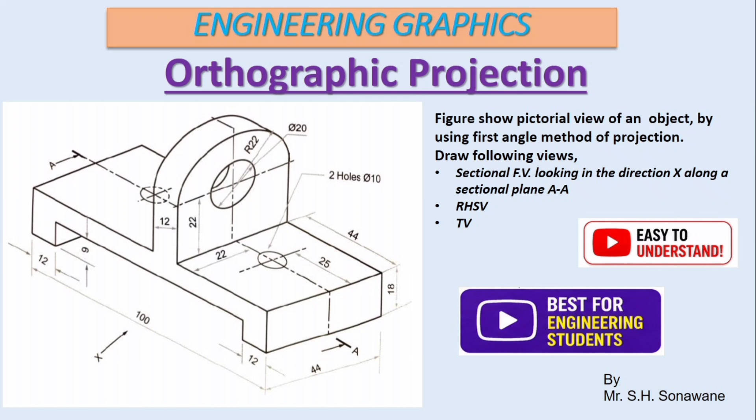In this session, we are going to solve another problem based on orthographic projection, and we are solving it in a simple and exam oriented manner. Here is the problem statement: the figure shows a pictorial view of an object using the first angle method of projection. Draw sectional front view along section AA, right hand side view, top view and dimensions.

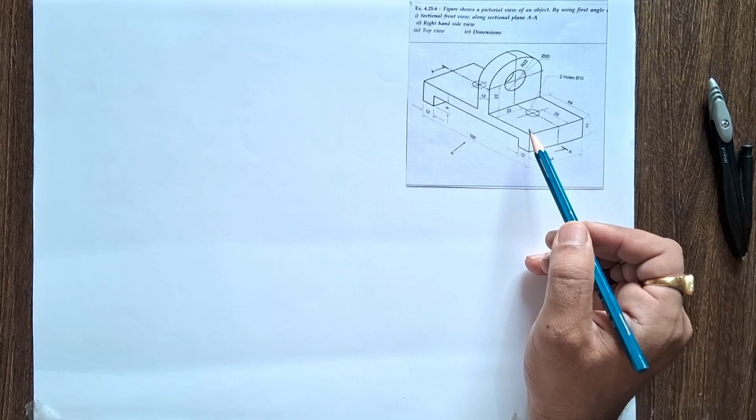This section is important in orthographic projection because in 3D views, some parts in front view, top view, left hand side view and right hand side view are not seen or they are hidden.

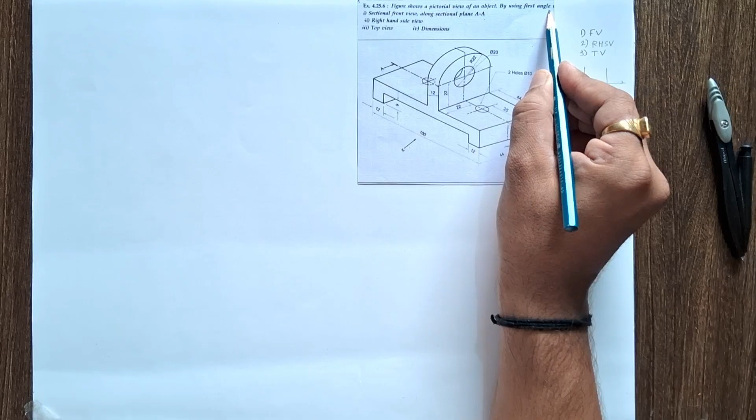So in the first angle method of projection, the object is placed in between the vertical plane and the observer. This is the vertical plane, this is the horizontal plane. So if the looking direction is x, on the vertical plane we get a front view for this object.

आणि मी जर वरून बघितलं तर मला टॉप व्ह्यू बघायला मिळेल. तर दिस इज अ व्हर्टिकल प्लेन, हा झाला हॉरिझॉन्टल प्लेन. Above the XY axis, the plane is called the vertical plane. Below the XY axis, the plane is called the horizontal plane. On the vertical plane we get a front view, आणि एक्झॅक्टली बिलो फ्रंट व्ह्यू आपल्याला टॉप व्ह्यू मिळतो.

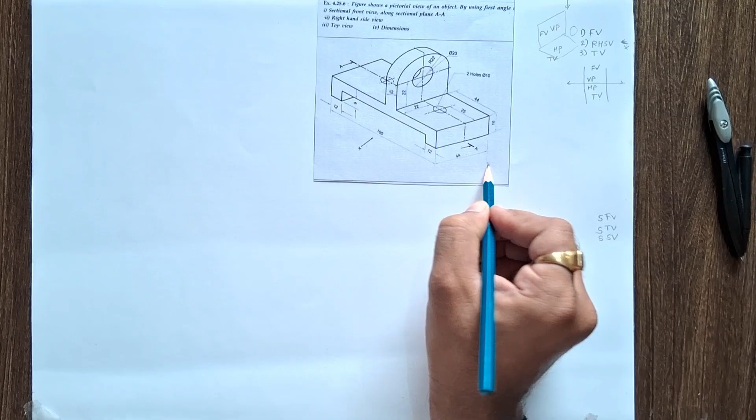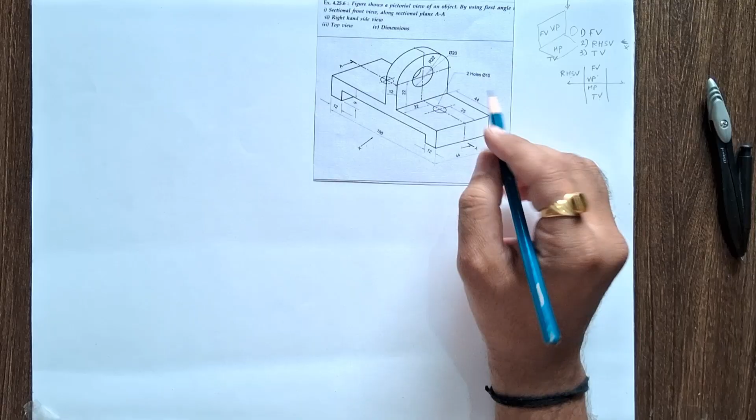पुन्हा एकदा लक्षात घ्या की आपण हा प्रॉब्लेम विदाऊट सेक्शन पहिले सॉल्व्ह करणार आहोत. त्यानंतर सेक्शनल फ्रंट व्ह्यू आपण फाइंड करून फायनल सोल्युशन फाइंड करणार आहोत. सी द सोल्युशन.

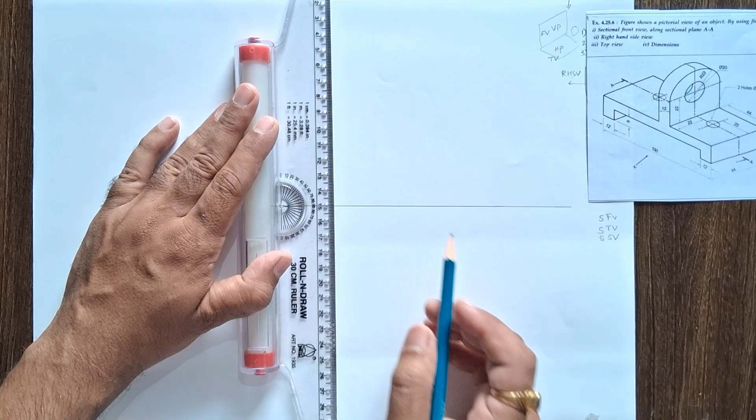Draw the XY axis first. And perfectly draw the perpendicular to the XY. This is XY. Then draw the reference line, another reference line which is at 10 mm on the left hand side and right hand side. So mark at 10 mm distance.

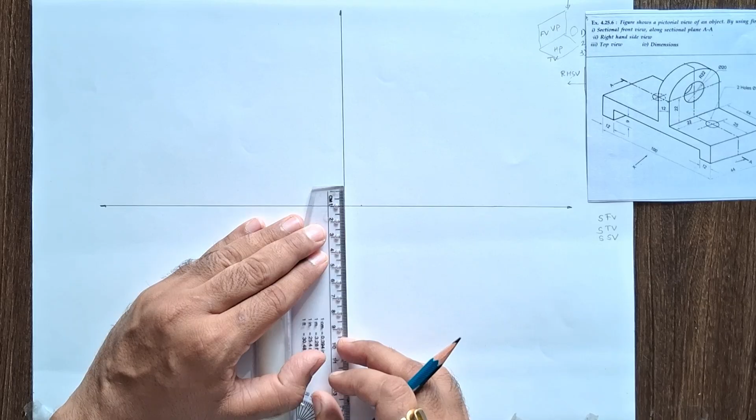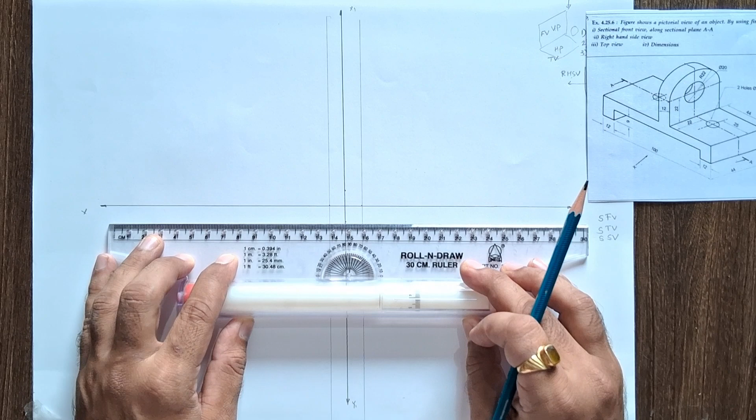And similarly above the XY and below the XY, again mark 10 mm distance. So this is X, Y, X1, Y1. Now draw the thin reference line. Draw the horizontal reference line.

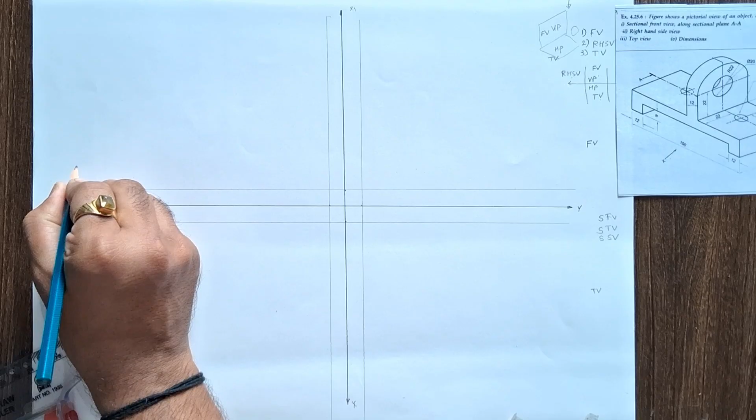So for this ortho problem we require this construction. This is a front view plane. हा इथे टॉप व्ह्यू मिळणार आपल्याला आणि दिस इज ए right hand side view.

Now see the object. Now the length of this object. Observer is looking at this object from this direction. So this is the length, from this end to this end is the length of this object.

In the front view, we can see this hatching section. This full surface is visible from the front side. These three circular holes are not seen from the front view or front side from the X direction. हा जो सर्क्युलर पार्ट आलेला आहे, हाफ सर्क्युलर सेक्शन, इट इज नॉट विजिबल. इट इज विजिबल बट इट लुक्स लाइक ए रेक्टेंग्युलर, it looks like a rectangular shape.

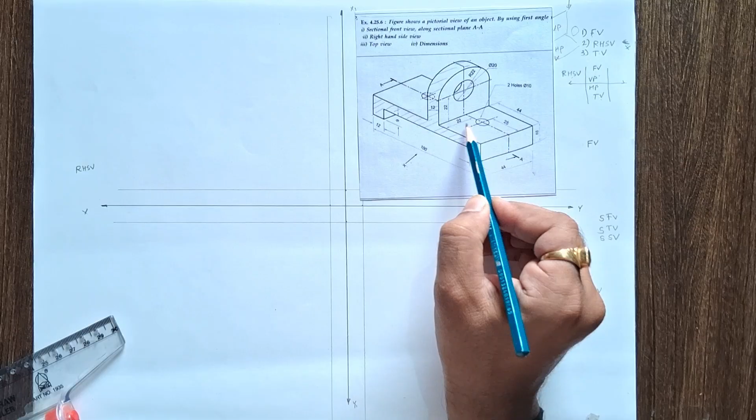Now here is the total length of this object, 100 mm. 100 mm is the total length of this object. Height of this object is 18 mm. 18 plus 22 — 18 is the bottom slab thickness or height, 22 mm is the vertical distance from this base to the center of that circle, and the radius of the outer circle is 22 mm. So the height for this object is 18 plus 22 plus 22. This is the total height for this object.

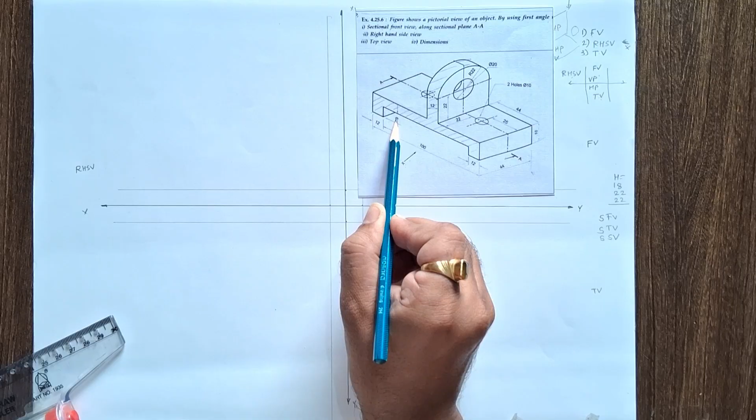Now you can see here the rectangular slot is given and its height is 9 mm. The thickness of this object is 44 mm and the vertical half circular wall is at the center of this object. Now we will see the solution.

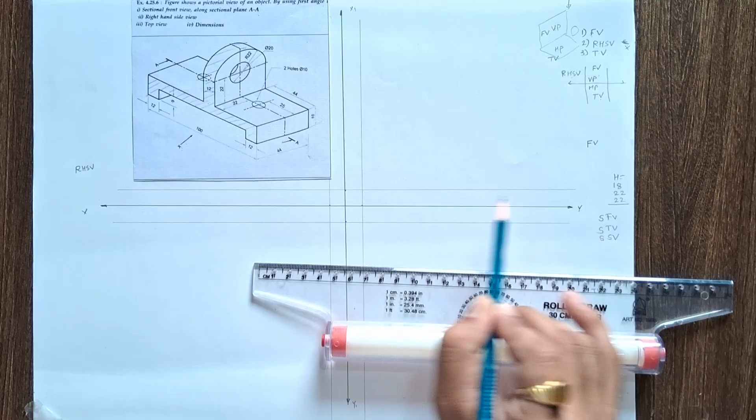We will draw the front view of this. सिंपल फ्रंट व्ह्यू विदाउट सेक्शन आपण सॉल्व्ह करणार आहोत. तर इथे हा जो कॉर्नर आहे, हा कॉर्नर परफेक्ट ओव्हरलॅप होणार आहे ह्या पॉईंटवरती आणि इथून आपण 100 mm डिस्टन्स मार्क करणार आहोत. This is 100 mm, 100 mm. Now the distance of these two small edges are 12 mm.

So we will mark 12 mm distance.

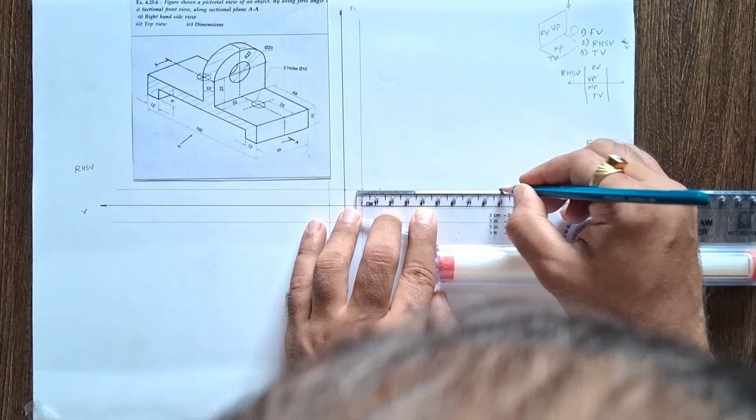From both the ends, we'll draw the 12 mm distance. Then the height of this bottom slab is 18 mm. So along the vertical plane, mark an 18 mm distance.

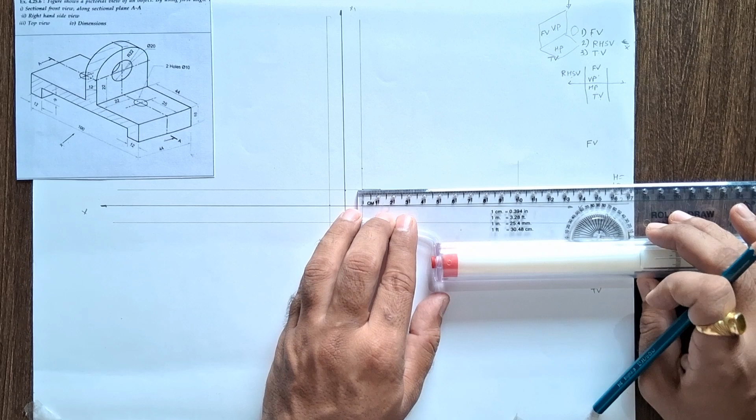Find the center of this object because this object is symmetrical. So the center position, midpoint position, is at 5 mm, 50 mm, 5 cm. This is the center line.

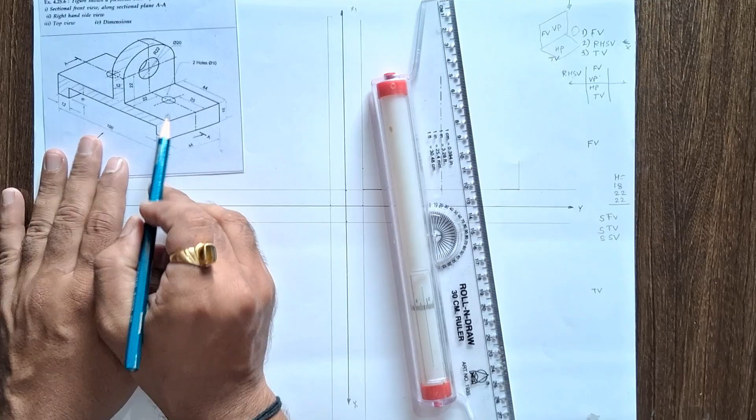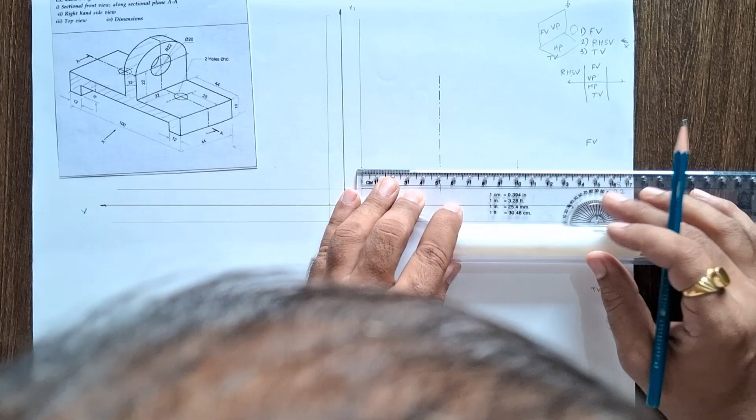This end to this end distance is 44 mm, given here. Similarly from this end to this end distance is 44 mm. First we will mark this point which is at 18 mm above the baseline, and then mark a 44 mm distance from both ends. This is 44. This is 44. Now these two edges are visible from the front side, from the x direction.

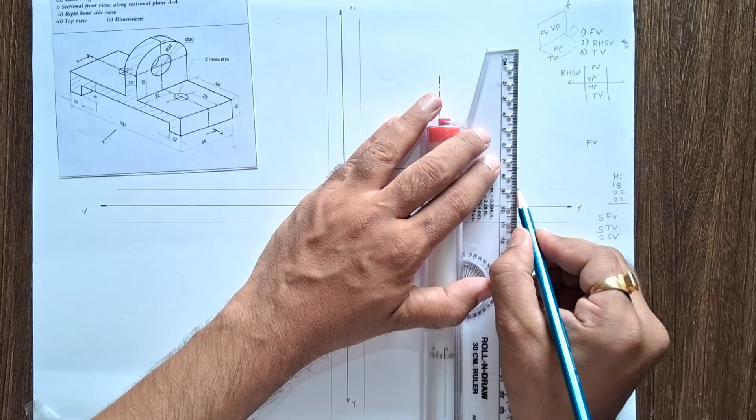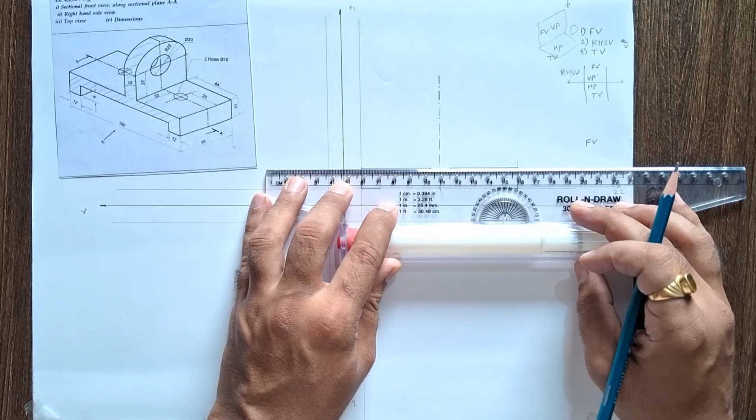Now here the bottom rectangular slot, its height is 9 mm. So from this point we can draw a 9 mm distance. So this slot is visible from the front side.

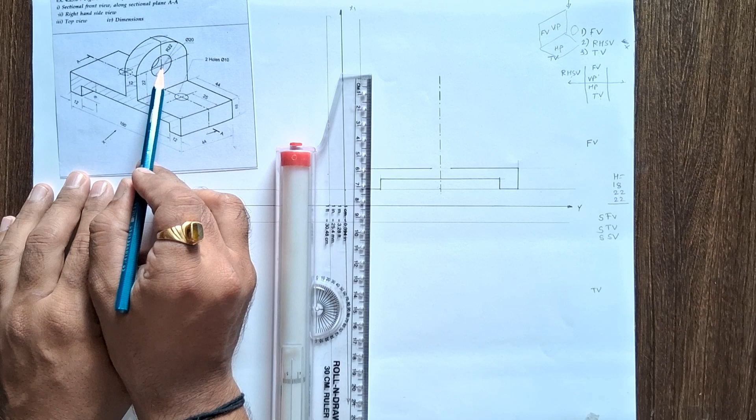Now the center of that circular part is at 22 mm above the base. So we will draw the 22 mm vertical line which is perpendicular to the base. Now this line is perpendicular and the height of this vertical edge is 22 mm.

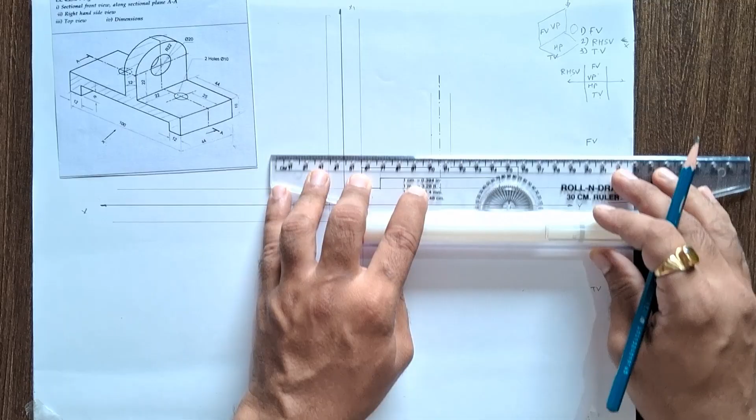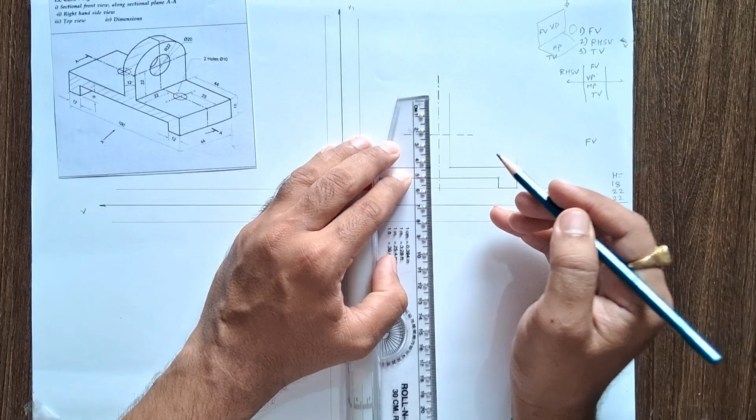This is 22 mm, and from this point we can draw the center for that circular part. From this center, the half circular part, its radius is 22 mm. R22 is given. From this, we will mark again a 22 mm distance. So this distance is 22 mm. So this part is visible from the front side.

Now on this part, on the vertical wall, there is a circular hole of diameter 20 mm. So along the center line, we will mark 10 mm and 10 mm distance. Because the circular hole is not visible from the front view, we can show this hole with the help of a hidden line.

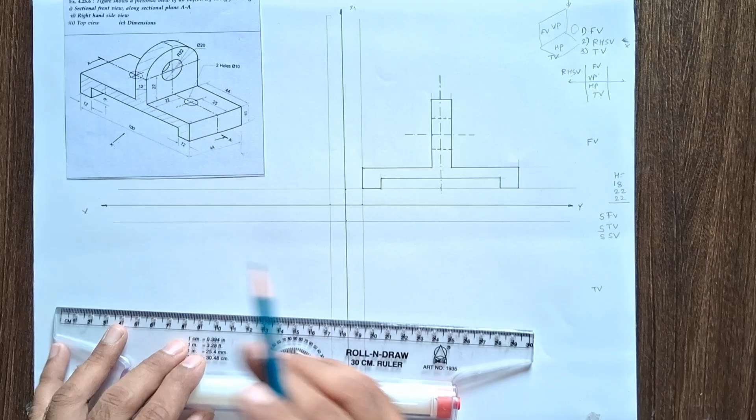This is the circular position. Now the two holes, their distance is given from both ends. The distance of the center point of this small hole is at 25 mm. So from both ends we will mark a 25 mm distance. From this end also, the other end, right end, you can mark a center line.

Mark a center line first and then draw a 10 mm circular hole. For that, measure the 5 mm distance in the compass. From both ends, from this center distance, mark a 5 mm distance. With the help of the compass, we can easily mark this distance, and by using a hidden line, show this circular hole.

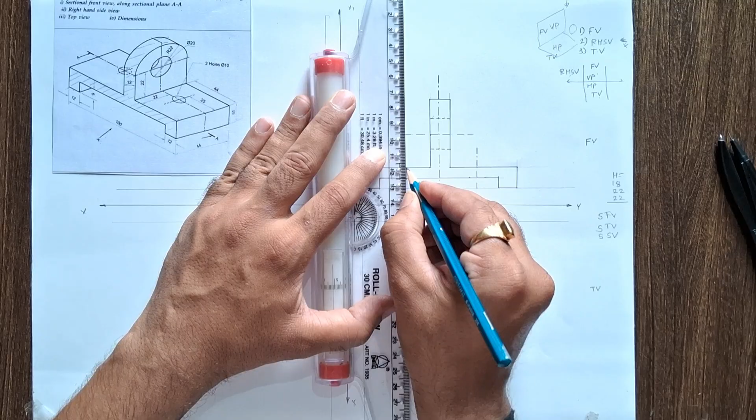This whole thickness is through, holes are through. Now we have completed the simple front view.

Now with the help of the front view, we can easily draw the top view. In the top view, we can see this full flat surface.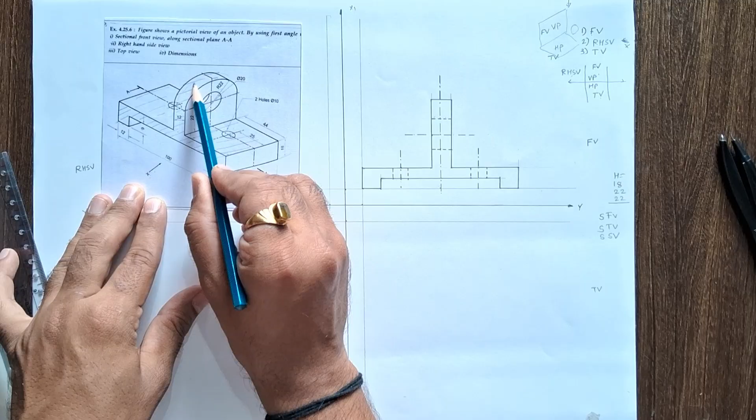As well as the half circular part we can easily see from the top view, top side. Now take a projection for the top view. Take a vertical projection on the horizontal plane.

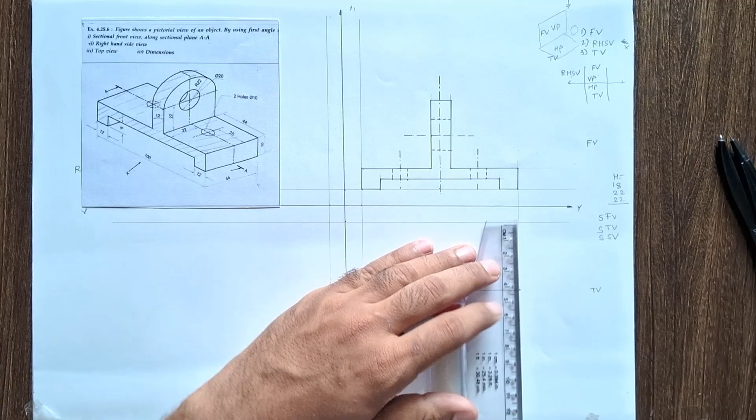Thickness is given as 44 mm, so we will mark a 44 mm distance. And this object is symmetrical, so we will find the center or midpoint, and the midpoint is at 22 mm.

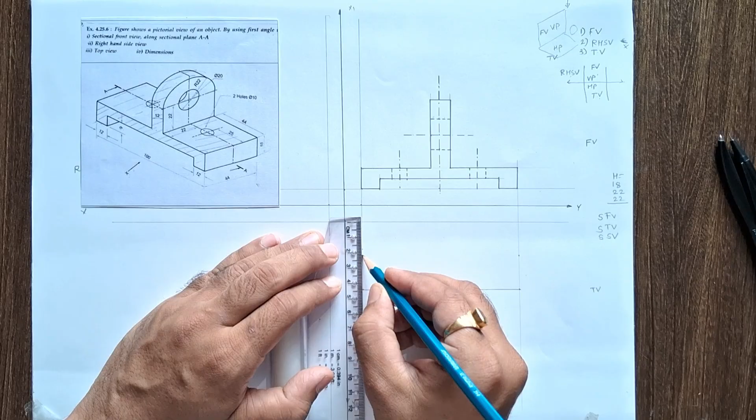So we'll mark a center line. Mark a center line.

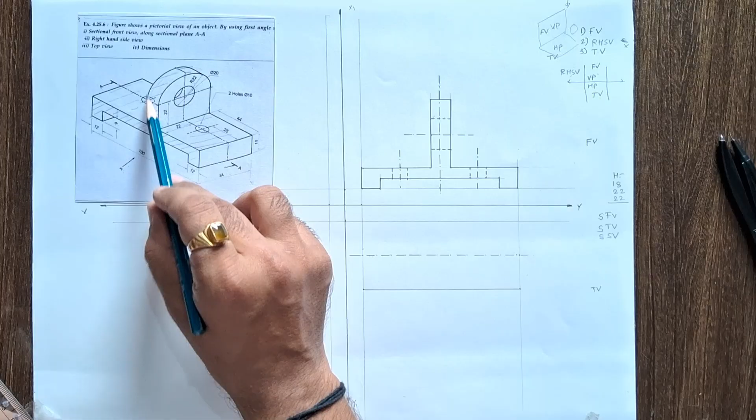If the object is symmetrical, we need to show the center line, and the center line is shown by using a long dash dot line, this is the center line. Now in the top view, this half circular part looks like a rectangle again.

So take a projection from the front view, take a vertical projection, and by using a thick line we can show this vertical wall as well as these two rectangular surfaces, which are visible.

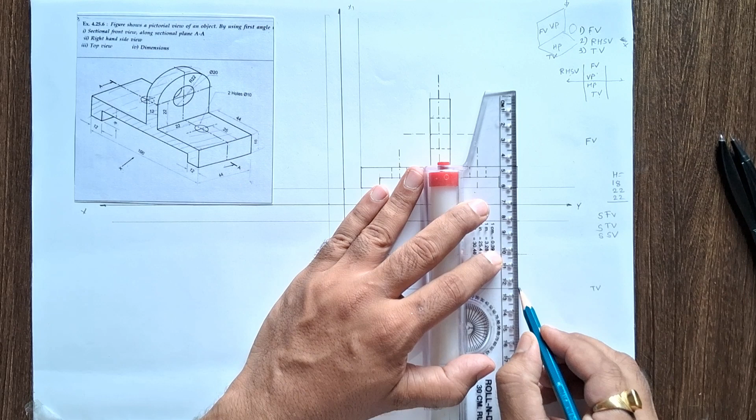Already these two holes are visible from the top, and we finalized their position in the front view. From this end, the circular hole is at 25 mm, so this distance is 25 mm. So you can directly take the projection from the front view.

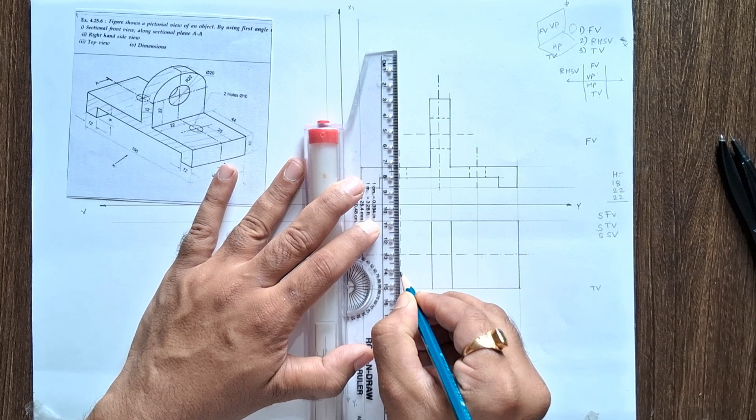And this line is a center line for this object. The circular hole center line is at 25 mm and 22 mm.

Now take the 5 mm radius compass and draw a circle.

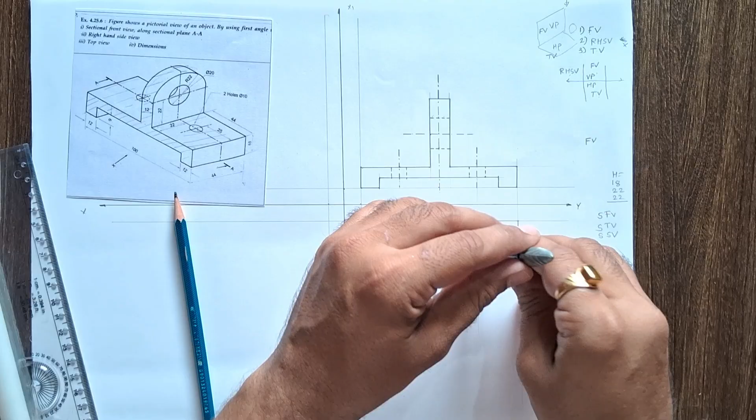Similarly, the other circular hole is visible. This is circular. Now, this vertical circular hole of diameter 20 mm is not visible from the top view.

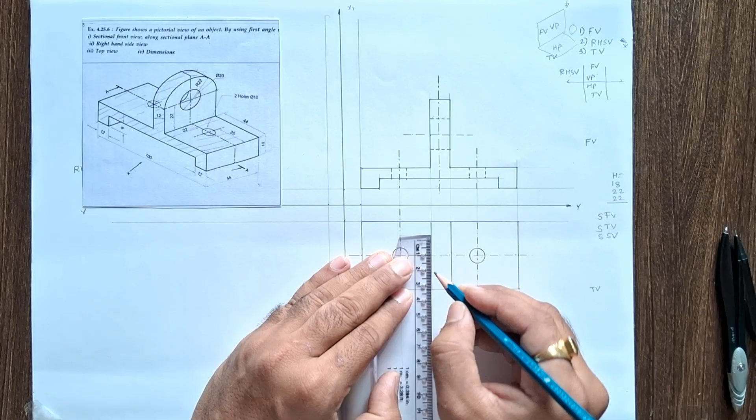The position of this circular hole is here. So from this center line, we will mark a 10 mm distance above the center line and below the center line. And by using a hidden line,

You can see, so this is a top view. One line is missing here. This slot's edge, the line going to the width side, is not visible from the top view.

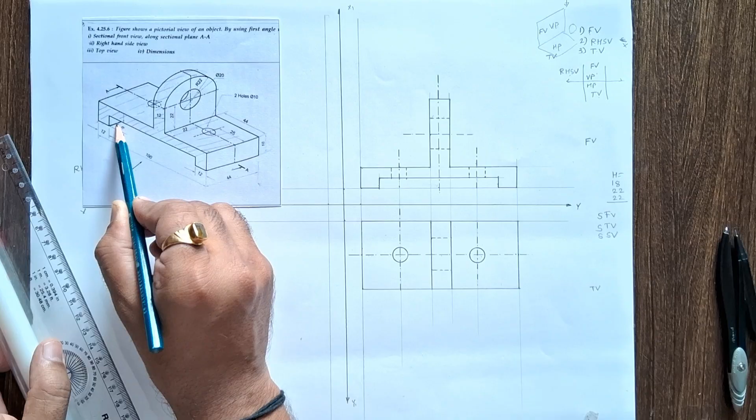So with the help of a hidden line, we can show this line. Similarly here, this edge is at 44 mm. Now this is the complete top view for this problem.

Now for the side view, from this intersection point, mark a 45-degree angle. This is a 45-degree angle. Now with the help of the front view and top view, we can easily draw a side view.

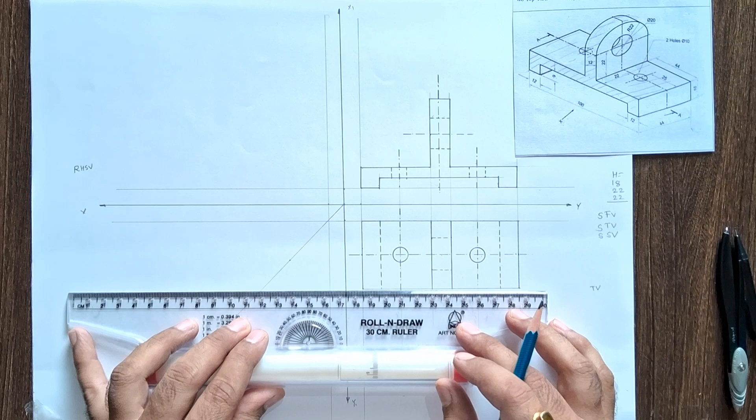So for that, take a projection from the front view and top view. So this is a height and this is a width.

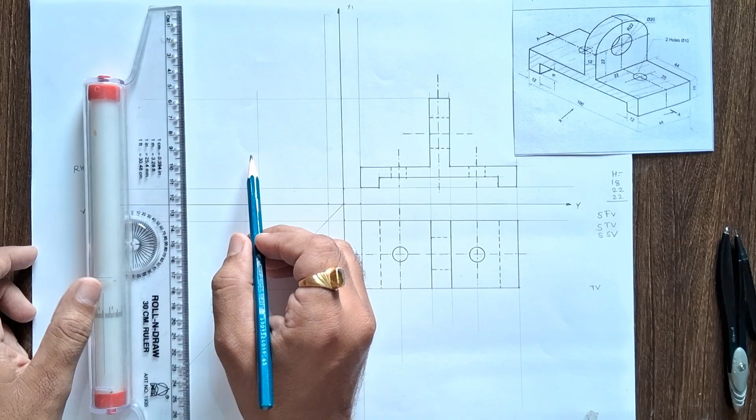Now we will get a box of dimension, width and height. This object is symmetrical, so we can show the center line along this side. Also this object is symmetrical, so we can find the center line of this object.

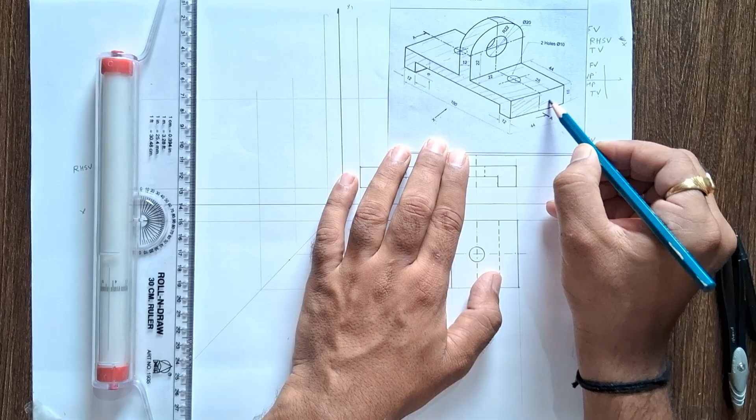Take a projection for the center line. This is a center point. Now from the right hand side view, this rectangular surface is visible, as well as this vertical circular part is also visible.

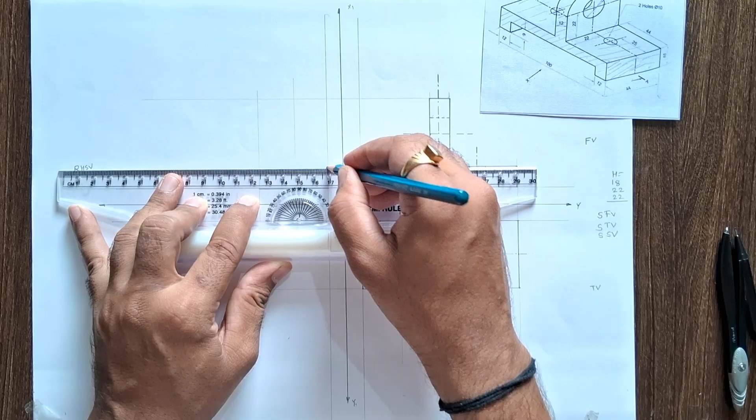In the right hand side view, this circular hole of diameter 20 mm is visible. So we will draw the rectangular part from the front view. Take the projection, but before that draw the baseline, then take a horizontal projection from the front view, so this rectangular part is visible.

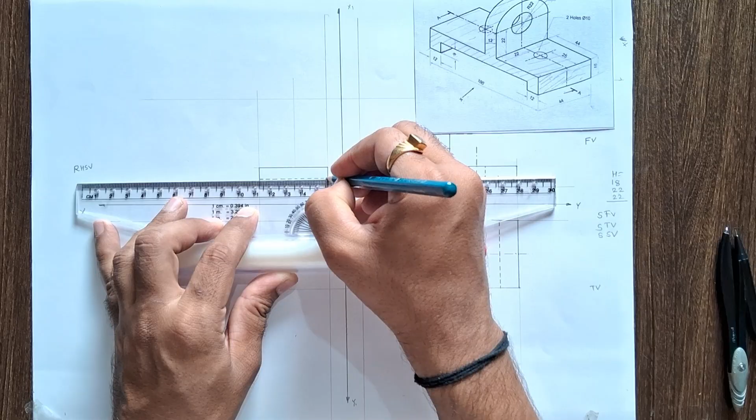This rectangular slot is not visible, and you can see we already showed this rectangular slot in the front view. So with the help of hidden lines we can show this non-seen part. The vertical wall is at 22 mm.

So here is the center line for this circular hole. These two edges of 22 mm are visible.

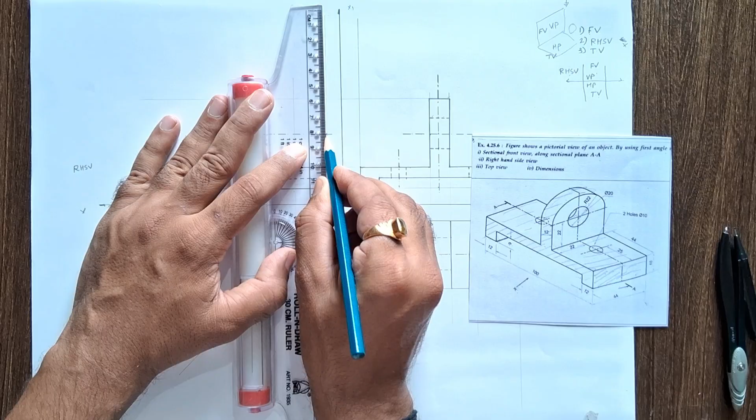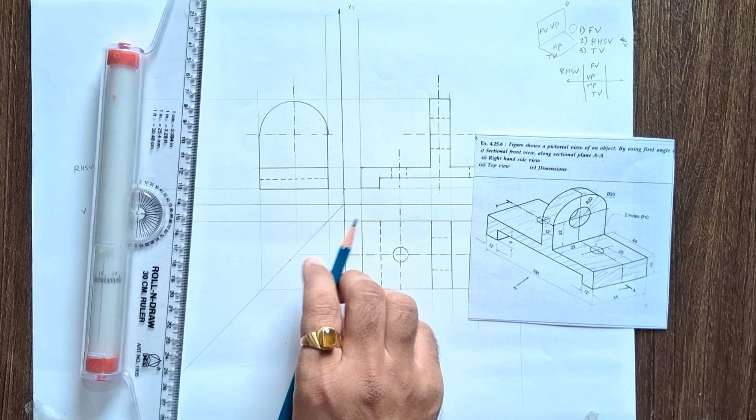This half circle is visible. Again show the center line for this half circle, and here there is a circular hole of diameter 20 mm. So take this radius in your compass and draw a circle.

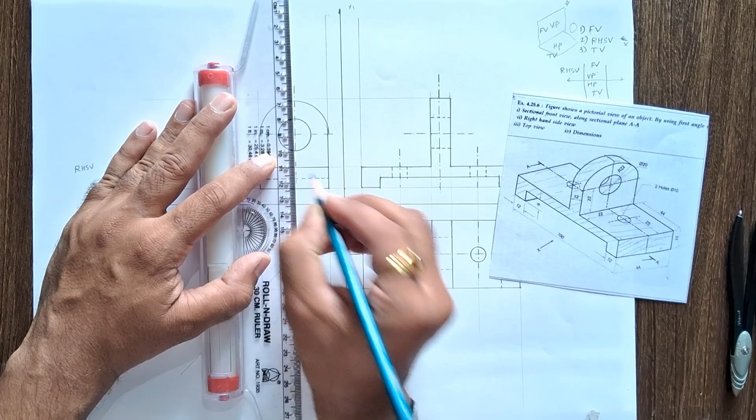Now these two holes are not visible from the right hand side view. So its position is here, and 5 mm is the radius, and 10 mm is the diameter of this.

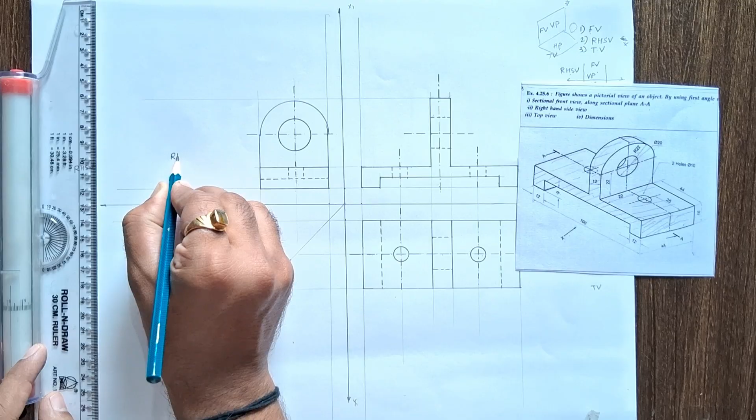So you can measure the 5 mm distance, and from both ends, from this center line along the left side and right side, you can show this small circular hole. This is the right hand side view for this problem.

This is front view, top view, and right hand side view. This is a without-section solution for this problem. So without section, we can see this profile.

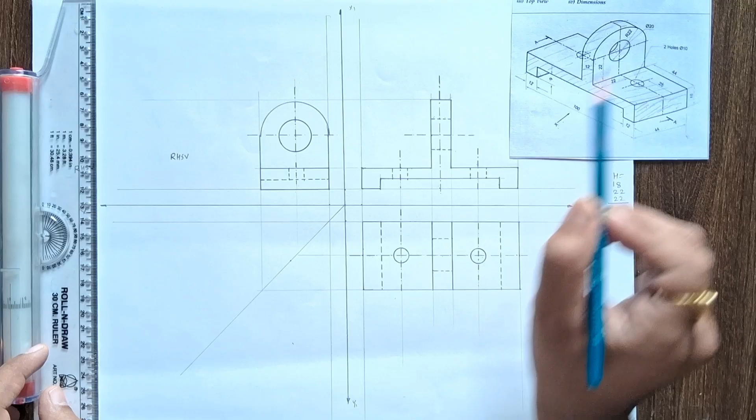These three holes are not visible in the front view. In the top view, this bottom slot is not visible, and this circular hole of diameter 20 mm is not visible. In the side view, these two holes as well as this rectangular slot are not visible. But in this problem, what is asked?

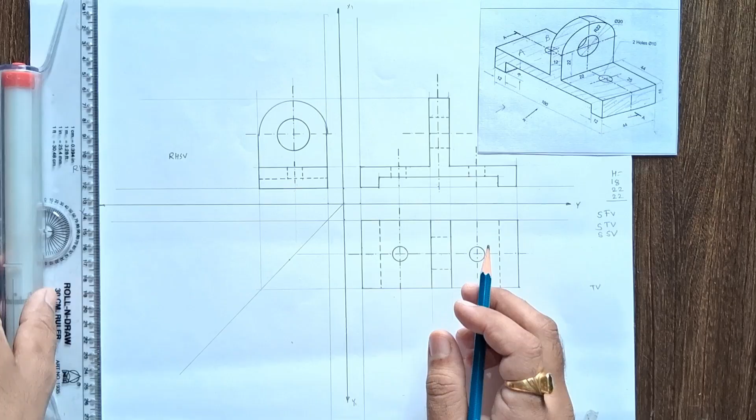So we can directly draw the circular edges, circular hole edges, with the help of a thick line. These all edges are visible. You can see this edge position is here, another edge position is here, its diameter is 10 mm. Similarly this edge appeared here, and this edge appeared here, and similarly both ends of these circular sections are visible here.

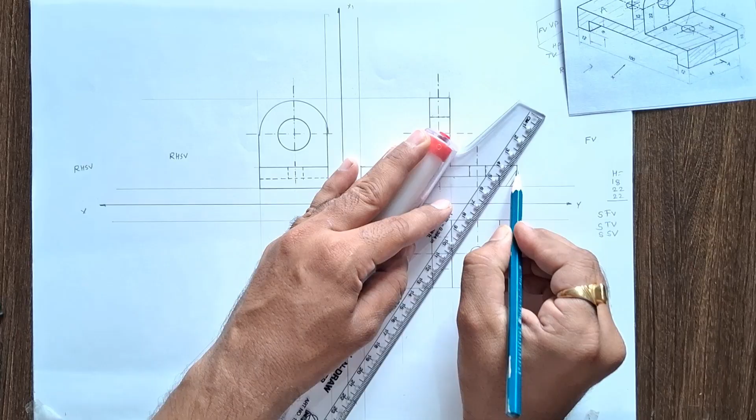Now with the help of hatching lines, we can show the section or cutting section. So adjust a roller at 45 degrees, and by using a medium thick line at a constant angle, show the section line. All these lines are at equidistance, maintain the gap.

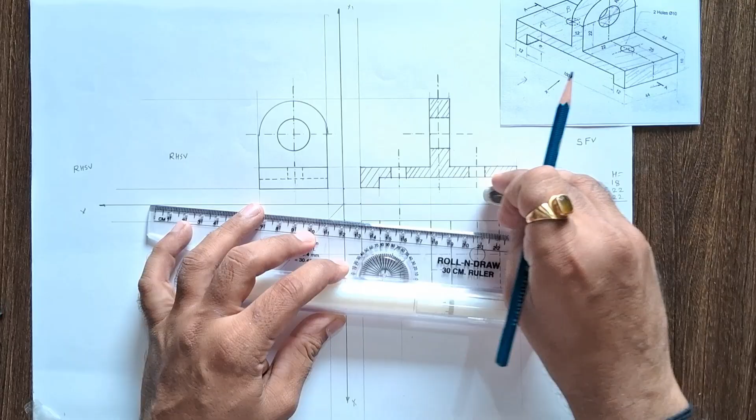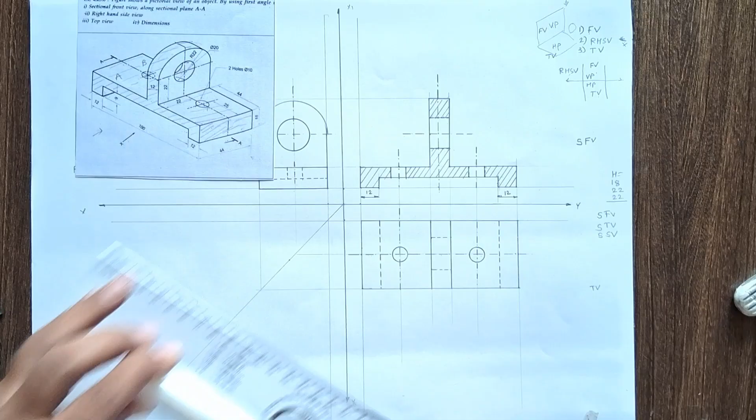Give the dimension above the dimension line. So this is 12 mm, this is also 12 mm. The total distance, total length of this object, is 100 mm. So this distance is 44 mm, the distance.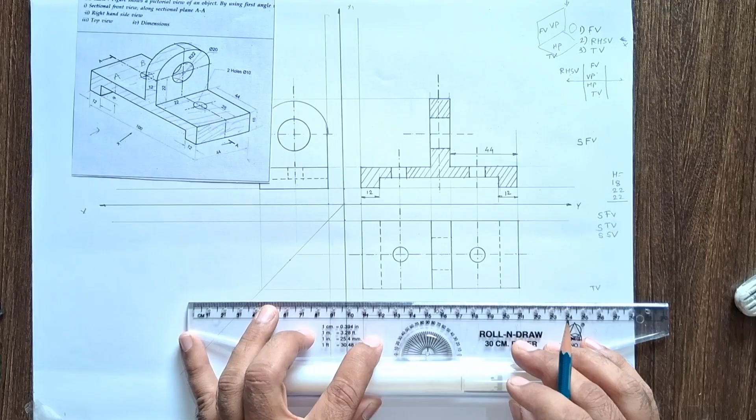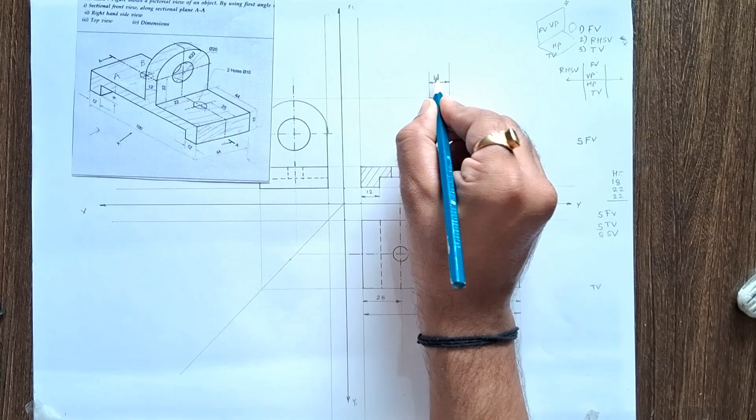This is 25 mm. The thickness of the vertical wall is 12 mm, 12 mm. Then the two circular holes, phi 10.

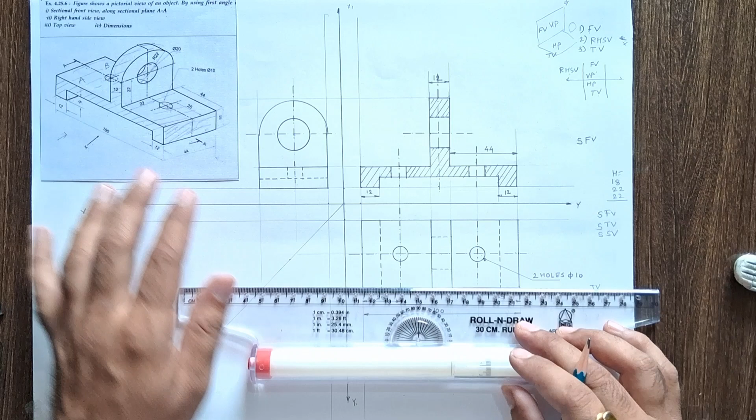Then the width you can show here. 44 mm, the distance. The vertical distance, center to flat surface distance, is 22 mm.

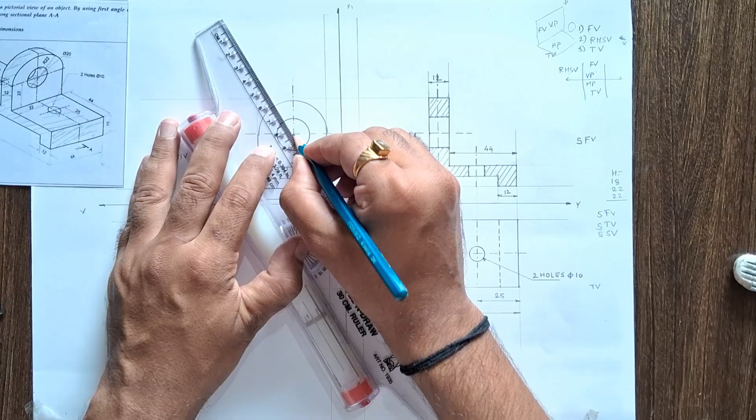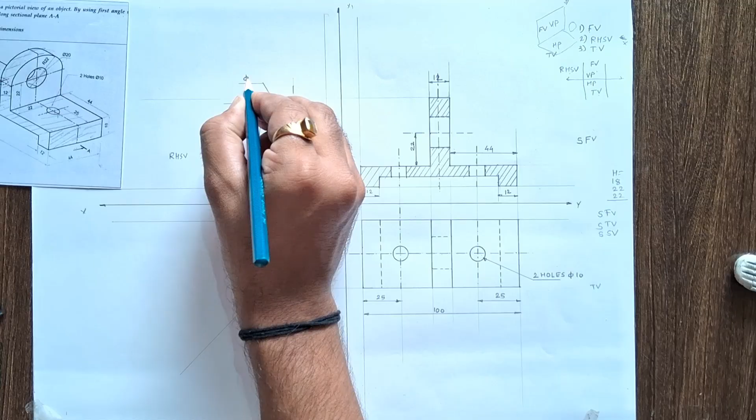So the diameter of that hole is 20, and its radius R22, R22.